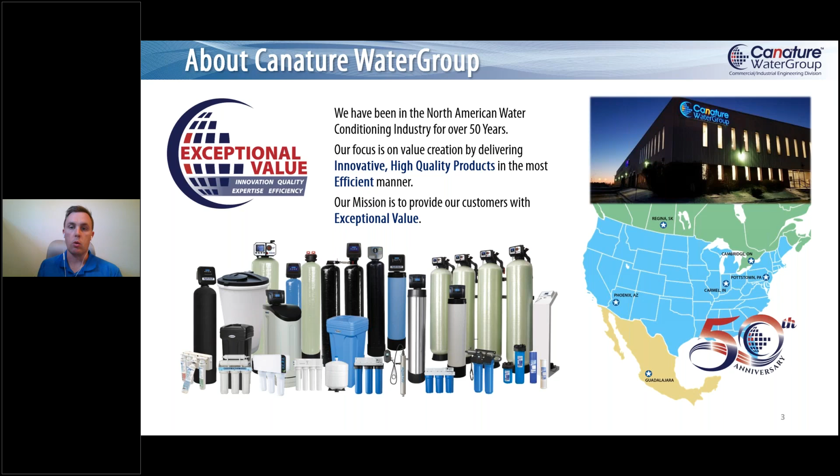Part of that value is having a great team to support not only you when you're making your selections with regards to equipment, but also helping your customers know they've got the support they may need down the road - whether it's standard maintenance, troubleshooting when something isn't working quite right, or even generic questions about how the system works. That way your customers, or even you yourself, can get a better understanding of what's going to be installed, how it's going to work, and how it will work in conjunction with everything else.

So enough about all that - we'll get into the meat of today's presentation. What we're really going to focus on today, as you can tell by the cover, is commercial water softeners: why they're used, where they're used, and the conventional design. Once we've covered that to understand the history and why we're using them, we'll look into how ion exchange works. We'll take a look at water softener meters quickly to understand how they work as well. Then once we've understood both of those options, we'll look at whether there's a better way to actually design a water softener so it better matches the systems and buildings we're talking about.

What I really want to focus on primarily today is commercial applications and municipal water quality, just so we can rein in our focus on exactly what we're looking at - I'll define what both of those mean later on. I won't be touching too much on high purity water; not that we can't discuss it later, but this presentation will focus solely on the other options I mentioned.

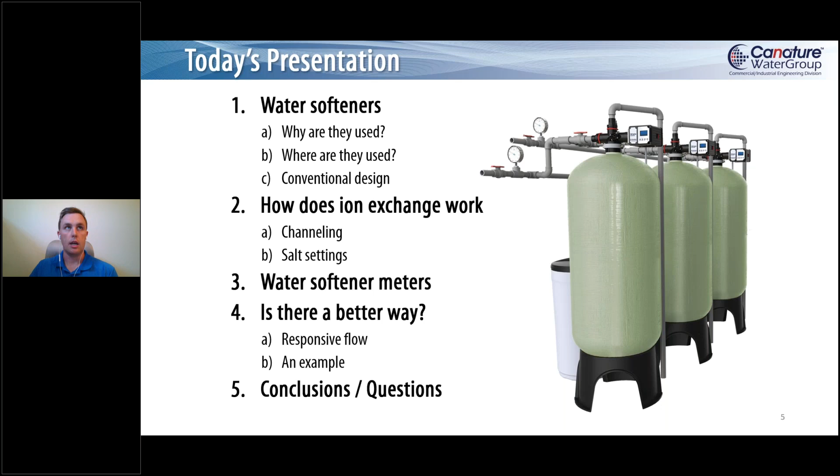So first of all, why are we using water softeners? It's probably the big thing we need to understand first before deciding whether or not to install one. Water softeners use ion exchange to remove nuisance minerals like calcium, magnesium, iron, manganese, and other cations if there are any in the water we're worried about, and replace them with the desired cations to soften the water.

Normally that desired cation or mineral is sodium. However, there are examples of other people using different minerals, potassium being the other one, where they're trying to put that in the water instead of, say, sodium. But sodium is far and away the most common one that we use in terms of the exchange that we want to make.

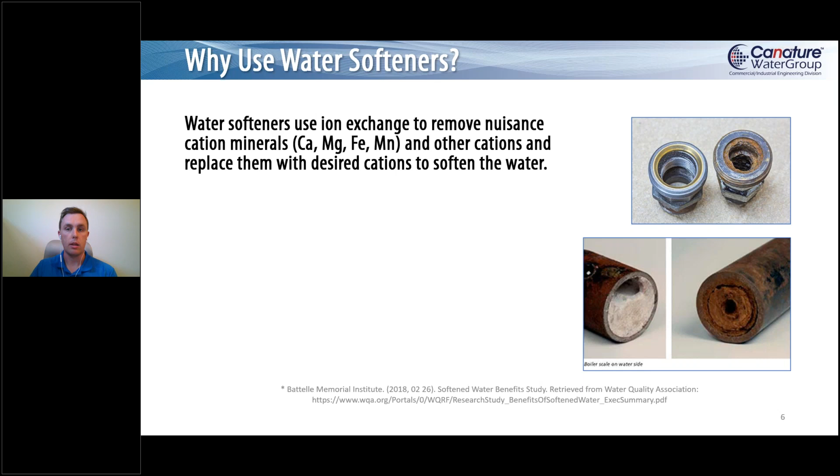So these nuisance minerals can cause things like scaling in pipes, equipment and fixtures, like you can see in the picture on the bottom right. That's some pretty heavy scale on boiler tubes that obviously have not seen the proper pre-treatment and or chemicals applied to them. So part of that scaling and buildup can really shorten the lifespan of your equipment and result in really high maintenance costs, a lot higher than probably you projected going forward.

The nice thing about softened water as well is because all our minerals are removed and you don't have that scaling factor, our energy costs for heating water are far less, because you don't have that scale buildup that provides an insulative layer against the heat transfer that you're trying to get into the water.

Softened water, because of the way that the calcium and magnesium works with the soap in the water, you need a lot less soap in order to achieve the same amount of cleaning power, to put it simply, with softened water compared to hard water.

And then a couple other things here: spotting on dishes, glasswares, automobiles, that sort of thing. So if you're looking at things like hotels, car washes, and that sort of thing, softened water is going to rinse away better, and when it does, you're not going to leave those spots on the cars necessarily like you did before.

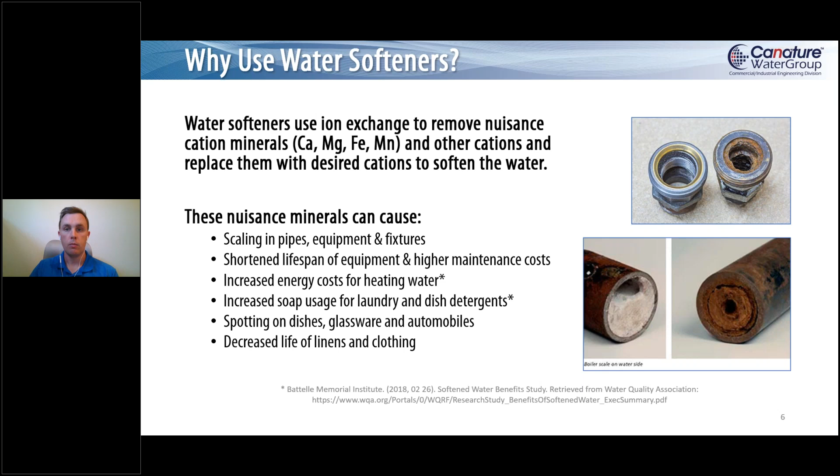So where are water softeners used? Well, I kind of hinted at it a little bit, but to put a bow on it, really anywhere where you're encountering hard water is somewhere where you're going to want to put in a water softener.

Hard water, as defined by the Water Quality Association, is anything above 5 grains. Very hard water is considered 10 grains, but really anything above 5 is something that we should be looking at. So places like hospitals, doctors' offices, and that sort of thing are going to be wanting to look at soft water.

Schools, hotels, restaurants, any place where, like I mentioned before, some of those impacts in terms of the equipment being maintained poorly, some of the aesthetic issues regarding spotting and deterioration of whatever it is you're trying to wash over time — anywhere you're looking at those options is where you want to put in a softener. Another area to look at is pre-treatment for some of these heavy use fixtures, boilers, or RO systems and that sort of thing.

One last point on where they're used: water source really doesn't play into it too much. You can find hard water at any of these sources, whether it's municipal, well, or surface water. Typically speaking, you're going to find less hard water with surface water than you would find with well water, but it's not that one sort of dictates the other.

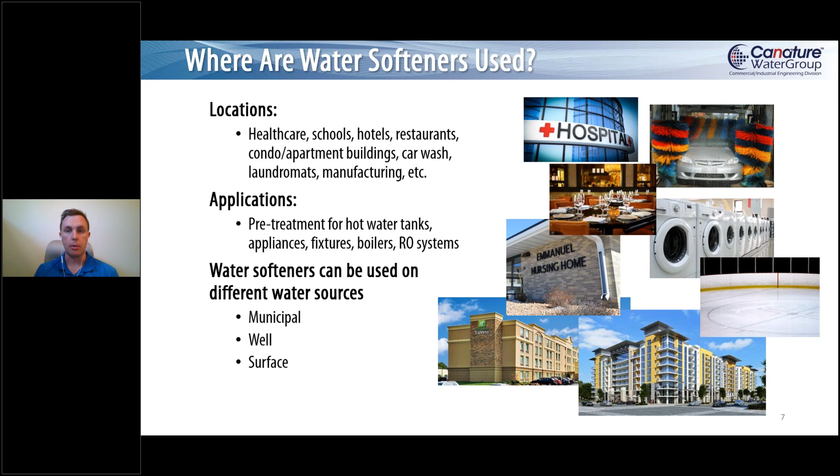The best way to always figure that out is you always need to make sure to get a water quality report of whatever application it is that you're trying to work on.

Now with regards to the softeners, in terms of how we approach softening the water, we'll look at it from two perspectives. The picture on the left here would be a large single or twin alternating system designed around the peak flow rate, and on the right is a multiple tank system (MTS) that uses smaller tanks in order to try and match the flow rates a little bit better.

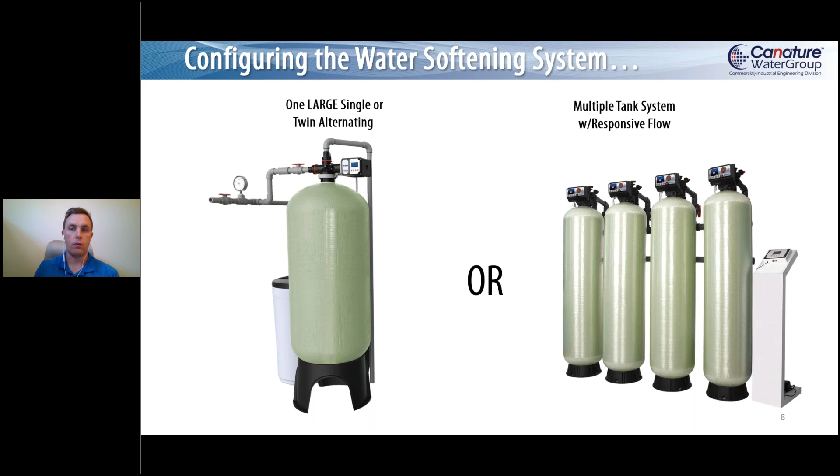So first we'll take a look at the option on the left, this large single or twin alternating, get a feeling for what that means.

With regards to conventional single tank design, it's usually approached as a one-size-fits-all flow rates approach. Usually when designing these systems, you'll define whatever flow rate you want to match, whether it's peak, critical, or maybe based on some sort of pressure drop, based on a service flow rate, whatever you have.

And then you may put two fiberglass tanks on the system if you need 24/7 water. That way when one softener gets depleted, it'll flip the operation over to the second tank, and that first tank that was in service will then regenerate and sit there and wait for the other tank to do its thing.

Typically, these softeners operate at around a 10 or 15 pound per cubic foot salt setting. I'll get into later what that means and how those numbers impact what we're doing.

In terms of your regeneration cycles, they're made standard across all water chemistry types. So we're not really concerned whether it's surface water, which could have some turbidity in it, or municipal water, which is typically very clean compared to some other places, or somewhere in between.

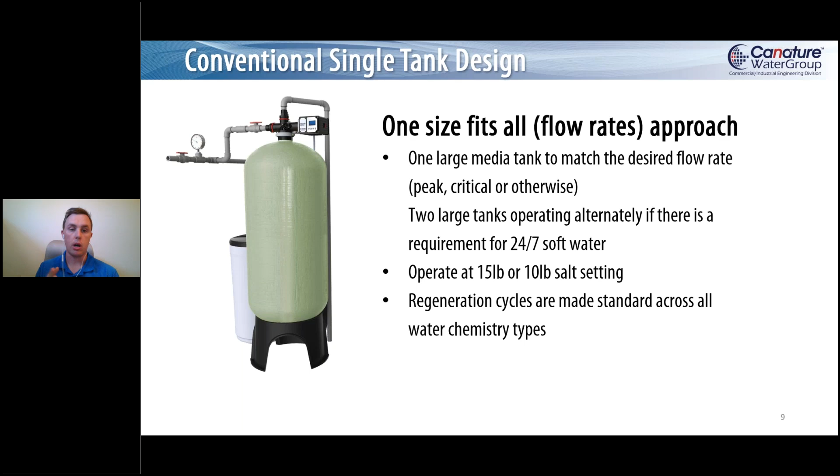In terms of the advantages you're going to see with a conventional single tank design, you're looking at simple installation with minimal piping. There's only 1 or 2 tanks there, so there really isn't a whole lot to do in terms of plumbing.

Simple operation and troubleshooting, meaning you've only got the 1 tank there, so you always know whether or not that tank is either in service or regenerating. If you do need to do some troubleshooting, it's generally pretty easy to figure out which valve is not working properly or media bed or what have you, because there's only 1 or 2 systems there.

For single tank options, these systems are generally inexpensive and they can fit into pretty tight spaces. But once again, that's for a single tank. The duplex option, you have to figure out whether or not it works within your footprint.

With the high salt settings, as I've mentioned, that 10 or 15 pounds, you get a very high capacity per cubic foot, which means you get longer service run times, and you also get some low hardness slippage, which might be advantageous for what you need.

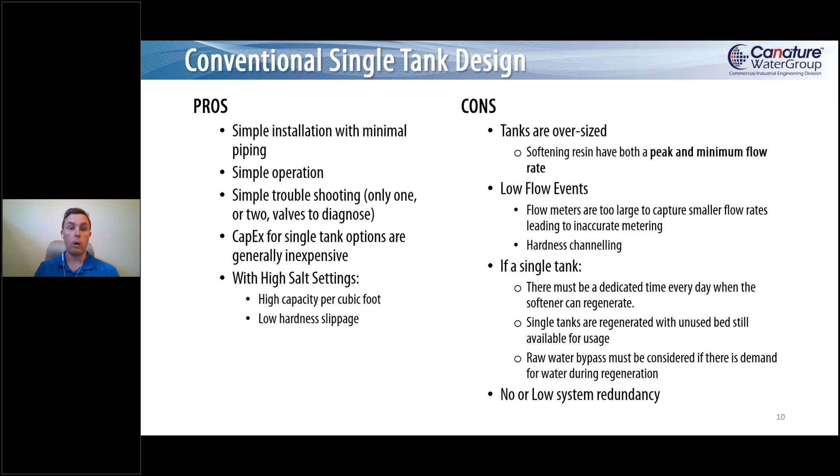However, some of the disadvantages we'd be looking at is that, typically speaking, tanks are way oversized for what they actually need for commercial applications. The thing we're going to really hammer home here today is that softening resin has both a peak flow rate, which we've talked about a little bit, but they also have a minimum flow rate that we need to respect to make sure that the water is getting softened appropriately.

During low flow events, these larger single tank systems generally have a much larger meter on there, and these larger meters aren't able to measure the water to the same accuracy or precision as a smaller flow meter. So that's also something we'll dive into. We'll also talk about something called hardness channeling, which is tied to the minimum flow rate of the softening resin.

If you do have a single tank, you need a dedicated time every day for it to regenerate. In some areas that's not that big a deal, like say a restaurant or resto-bar sort of thing, where they've got the lunch hour, the supper hour, and then they go into the evening for drinks.

But generally speaking, during the midnight hour or after midnight, depending where you are, there's really no water usage to speak of, so they can regenerate then. So a single tank system might work there. A lot of places that need 24/7 water, however, that's not necessarily the case.

If you do use single tanks, they'll also be less efficient because you're always going to design with them in mind, saying, hey, I want to make sure I always have softened water, so I'm always going to design a little extra capacity in there based on my run times and my usage.

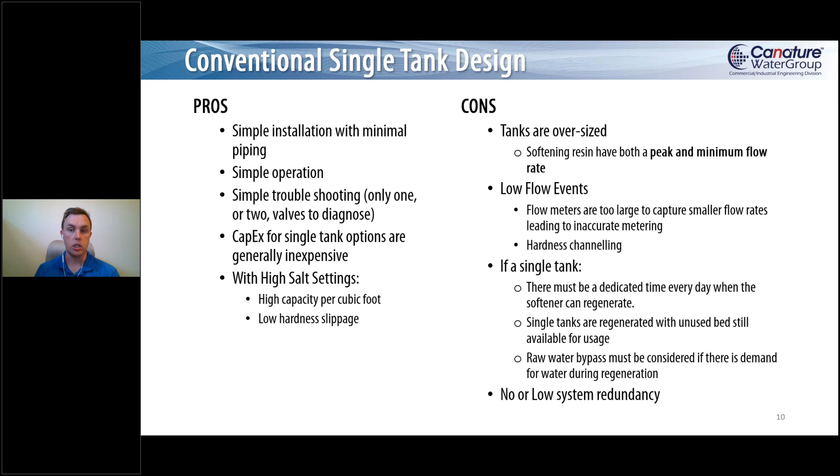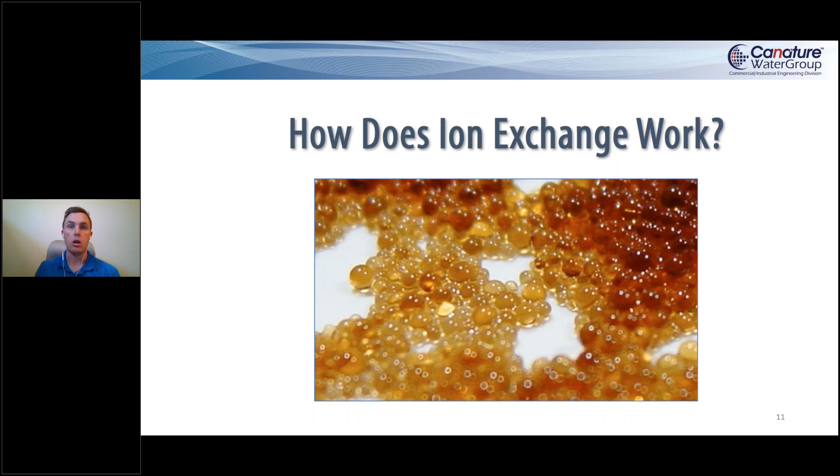So now that we've understood that, we're going to get into some of the basics of softening and really how it works. First, we're going to look at the workhorse of the system, the part that does all our work when it comes to softening water: the ion exchange resin. So ion exchange beads provide places - if you read the actual spec sheets, they call them functional groups - where these nuisance minerals I've spoken about are exchanged with sodium.

In the picture on the right here, we're showing a demineralization application where we actually have sodium being removed for protons, for hydrogen protons. If you picture that those sodium ions are actually calcium or magnesium, then it's the same sort of idea.

However, one inaccuracy with this picture that I like to point out is the way that this picture is shown here, with the cation exchange resins, these guys in red, viewed more like marbles - impervious marbles that water goes around in between the beads, and then goes straight down to the distribution, where you only have the exchange surface on the outside. And this is the way I actually thought of it for a long time too, before I started to educate myself on all this.

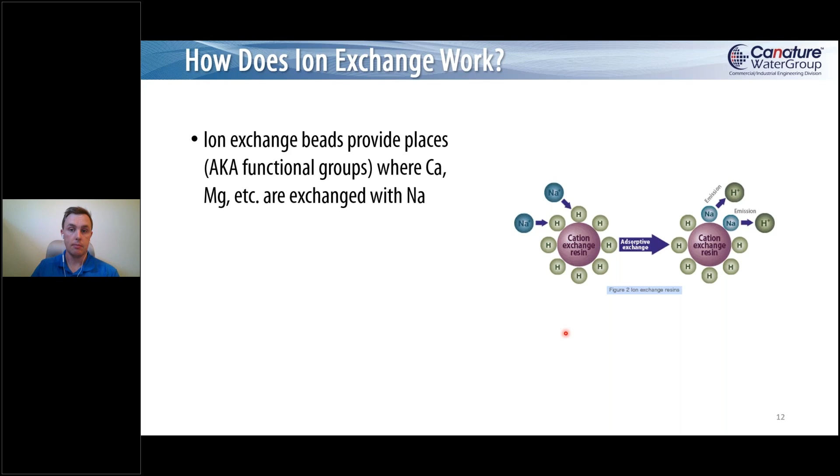What it actually looks like, these resin beads - they're not impervious marbles. They're more like spaghetti that's been stuck in a colander for too long after you've drained it. You know when you cook spaghetti and drain it off and leave it sit in the colander for say 10-15 minutes, and you try and pick it up, you get the whole clump at the same time. Well, that's more what ion exchange beads look like when you really get down and close on them. And all of those strands of spaghetti have all those functional groups where we want to do those ion exchanges. Really what we want to try and do is force the water through the beads - that's where the majority, if not 99+% of our exchange sites are, on the inside of that bead, not on the outside.

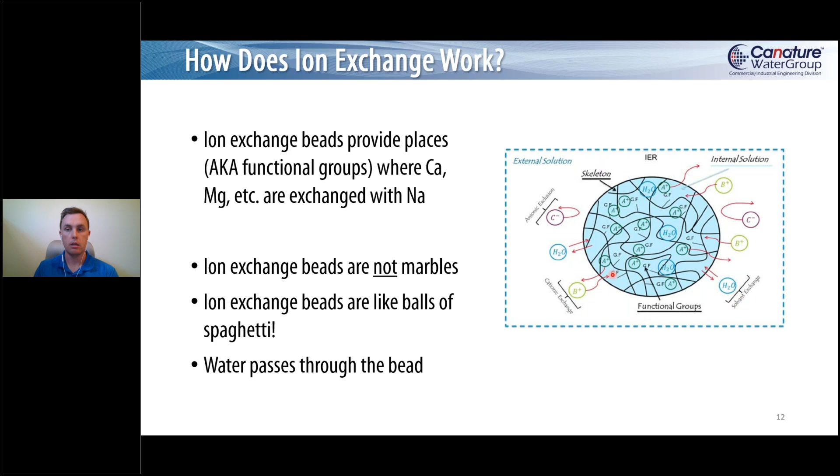And so this is where we speak to hardness channeling a little bit. When a softening system is sized appropriately, our hard water passes through that little green line there that I've shown, and it goes through the resin. This is only one path that it can take, but you can picture that the water will enter and exit at multiple random locations across the resin bead, meaning our entire resin bead is used evenly. And that means that as our resin beads are used evenly, as we continue to go down the depth of the bed, it also gets used evenly. So you're not worried about hardness bleeding through.

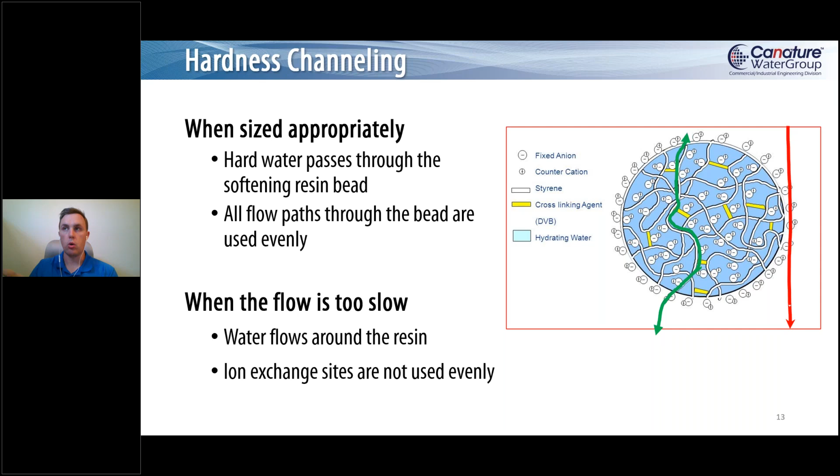However, when we don't force the water through the center of the resin, what ends up happening is the water starts to go around it. You can imagine this - only the exchange sites on the outside are actually used, but then you've got thousands upon thousands of exchange sites in the middle of the resin that aren't being used. So your capacity isn't being used properly, which means you get hardness slipping through the resin bed faster than you had anticipated. So why does it do this? Why doesn't it just go through the resin bead normally? Well, in a word: lazy. Water is lazy. Water is like all of us.

It has a point A that it wants to get to and a point B. Basically we're forcing it through the softener on the inlet side, and the water just wants to get to the outlet side. It doesn't care how it does it, it just wants to do it the quickest and easiest way possible. Well, the quickest and easiest way possible is actually to go around the resin.

And this is because of, if you've taken any sort of fluid mechanics classes, the no slip condition, but I'll explain this a little bit better here.

If you haven't taken it, you can picture when you've opened up a tap in your bathroom, kitchen, or wherever, just a little bit. You see the water comes out in a nice clean stream. You don't hear all that twirling, swirling noise. It just comes out, drops down into the sink, pools, and then goes away. That's what laminar flow looks like.

And the reason why it's called laminar flow is that the profile looks like this within a pipe, in the sense that the pipe wall holds back some of that water because it's got some friction associated with it. Meanwhile, the middle of the pipe, far away from the pipe wall and far away from any water molecules that are going to be held up, is going to go the fastest.

That works really well, but you can also make this water deviate and do a lot of different things because you're not pushing it through fast enough. So what we actually want to see is more something like turbulent flow.

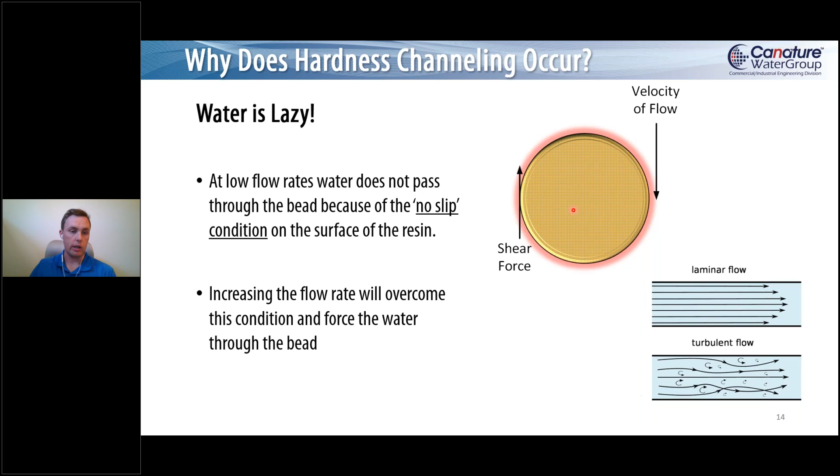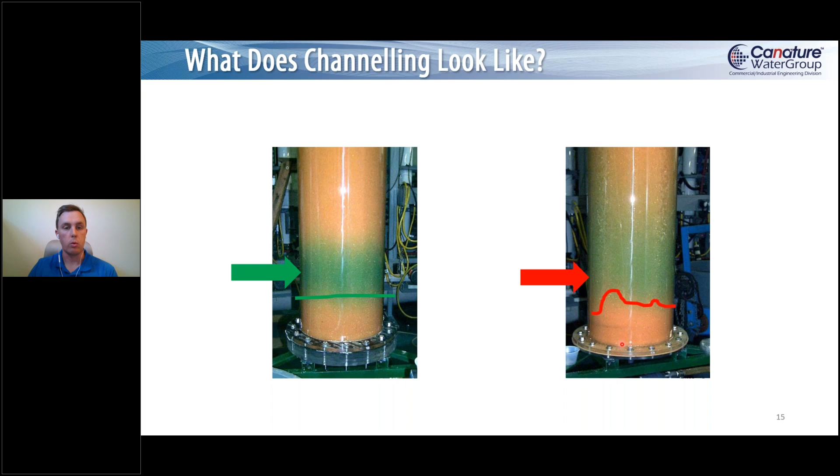So basically it means we have no idea where the control valve thinks the leading edge is, which is a problem, because if the control valve thinks the leading edge is way up here, that's a problem because we have all this spent resin down here and we're very quickly going to bleed hardness. So that's what's important with regards to those minimum flow rates versus higher flow rates.

So let's talk about salt settings. Just briefly here, it's one table, pretty quick, easy to understand. When I talked about those 10 or 15 pound salt settings, that means when we do regeneration, how many pounds of salt per cubic foot of resin do we want to apply in order to regenerate and kick off all those nuisance minerals and send them to drain.

So most large softeners are operating around that 10 or 15 pound mark. That means their capacities are higher, their base leakage is lower, which is good, but our water usage and our salt usage is way up per regeneration.

Versus if we get down to a 6 pound salt setting, yes, our capacity is reduced, but if you look at it, 15 pounds down to 6 pounds is, I think, a 60% reduction. But we've only reduced our capacity by 30%, 33%, right? That's not that big a deal in comparison. And that's because of the law of diminishing returns when it comes to actually regenerating the resin.

In terms of base leakage, 1.1 is fantastic, obviously. It's basically no hardness left in the water versus 5.5. But you'll notice this 5.5 number, if you were to look up some manuals for what most equipment considers soft water to be, it's all less than 1 grain per gallon, which is about 17 parts per million or milligrams per liter. So this 5.5 is still well under that.

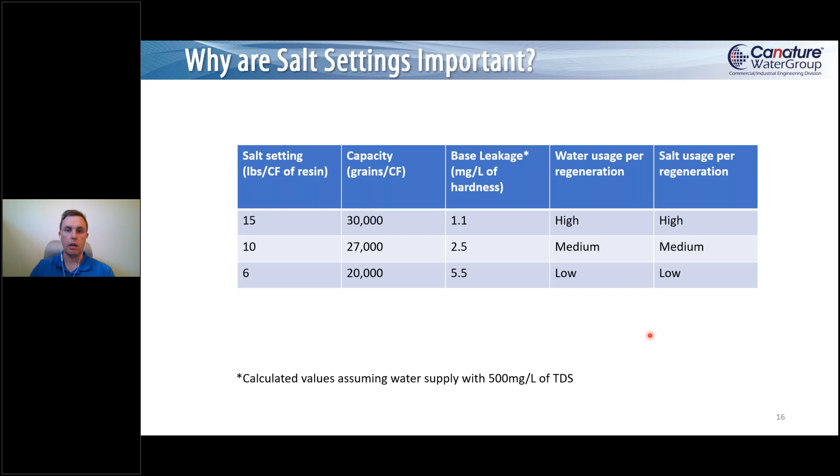So now when it comes to these flow meters, larger tanks need larger control valves because typically they have much higher flow rates going through them. So if it's a larger control valve, larger flow rates mean we need a larger meter. The thing about flow meters is they don't actually measure flow rate. They measure the velocity in the pipe, which then gets interpreted into a flow, whether it's calculated or whatever.

Versus when we get up to a 3-inch meter, then we've got that 7 gallon per minute mark, which is 10 times higher, but we've only increased our pipe diameter 3 times. That has to do with the whole area thing.

But the big thing is that while these are the minimum flow rates to maintain the flow rate, because this is what you're going to find on spec sheets typically speaking, once a flow meter stops, in order to get it moving again you need about double these values.

So that means now this 1.5 or 1.4, still not bad, but this 3-inch meter needs 14 gallons per minute. That's like the equivalent of 10 toilets running, or maybe 15 faucets. That's a lot of faucets that need to be online at once in order for this system to recognize flow and calculate for it. Once again, that gets to be a bit of a problem.

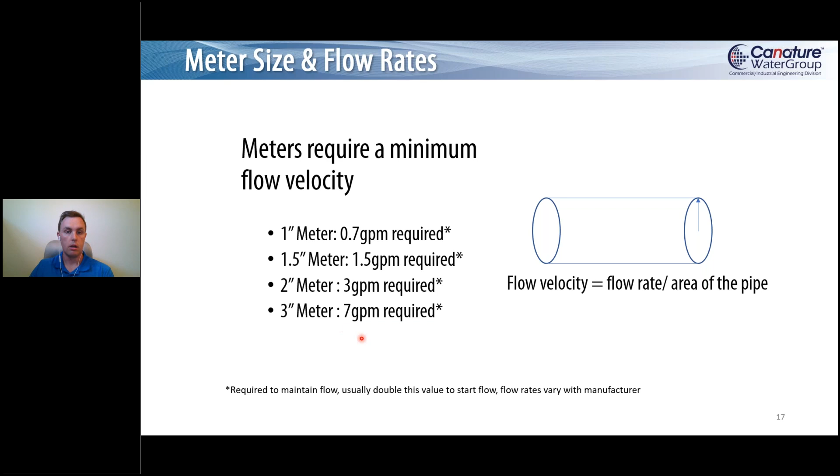So the big question about all this is: is there a better way? Now that we know all these things, we know some of the pitfalls of those larger softeners, where do we go from here?

So why do we need a change? Well, these old design values we're talking about, these peak flow rates, are still based on textbook values that are pretty old. If you take the Hunter curve, for example, that a lot of people are probably familiar with, in order to calculate your peak flow rates, that's still based on numbers from the 30s and 40s at best. There are some newer versions out there, but generally speaking they still oversize things quite drastically compared to what's actually being used.

Everybody's kind of aware of that for the most part, but when you're using it to size pipes, if your pipe's a little bit bigger, it means the person on the 30th floor of your condo building isn't going to complain about low water pressure because their pipe is choked down too much—not a big deal. The problem is when you have other equipment in there that has a minimum flow rate, that's where it becomes a problem, if you don't account for that minimum flow rate.

So to that point, one size fits all never fits all flow rates. And that's the major problem with these single and twin alternating systems—they're just based on that high peak flow rate. Those peak flow rates, by definition, are done for maybe a minute a day, 30 seconds, 10 seconds, whatever it is. There's still over 1,400 minutes left in the day that need to be accounted for in terms of your design. So that's something that needs to be considered.

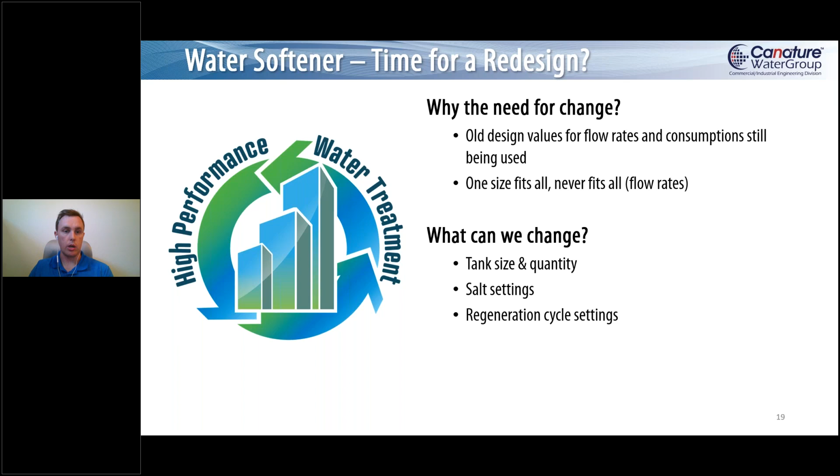So what can we change? What do we have the ability to change when we're designing softeners? We can look at our tank size and quantity. We can look at our salt settings, and we can look at our regeneration cycle settings. These last two will help with water efficiency, like we've stated. But the big thing is, how are these going to impact performance?

Well, let's get back to basics here in terms of what you need to know when designing a softener. First, let's look at the big bold items. We need to know the water chemistry, we need to know daily flow rate, we want to know what our flow rates are at any given time, and we want to know what the application is. Some things that aren't necessarily always looked at are things like the water source.

Are we talking about municipal water? Are we talking about well water? If it's well water, is it a dugout? Is it a 300-foot depth well? What are we saying here? Or is it a spring? Or maybe we're sucking out of a pond that has canoers on it frequently, and that intake pipe is going to get filled up with turbidity. And that's actually a thing—I've run into that before, where somebody was having trouble with their softener, and it turned out every 6 months or so it would be all filled with sand.

Because there'd be some paddlers that would be going through a pond where it was close to the intake pipe.

Next thing we want to look at are our flow rates, and we need to understand what is the minimum flow rate that we're willing to accept. Not that we need, because obviously it would be nice if it was zero, but it's never going to be zero. That's borderline impossible. So we just want to understand what is our minimum flow rate that we're willing to accept for the softeners, and then how do we manage that?

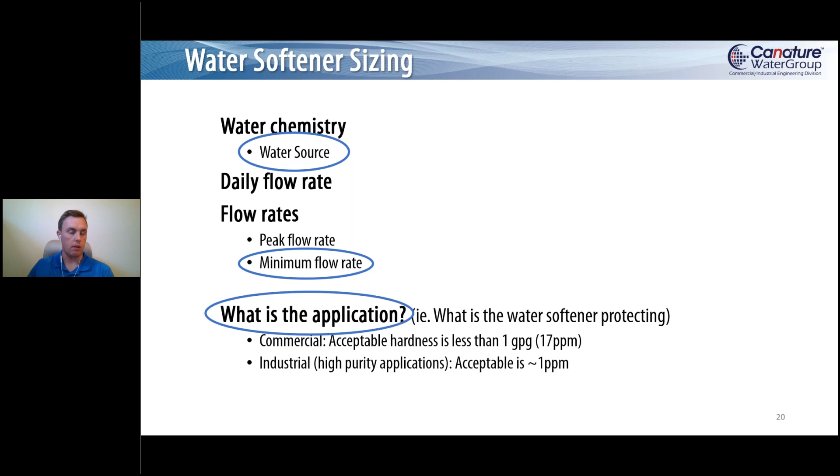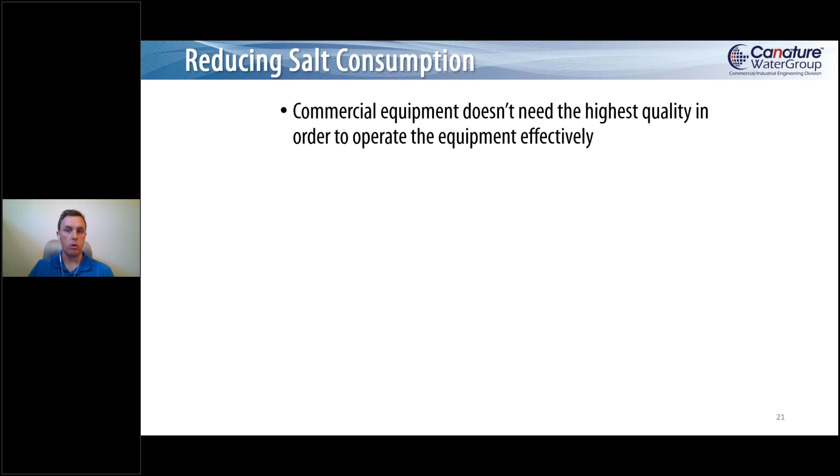It all sort of depends. So when it comes to reducing salt consumption, because commercial equipment doesn't need the highest quality water in order to operate effectively, we can reduce our salt setting and still get performance we're okay with. If you remember that table I showed, we're talking about going from 1.1 parts per million of hardness to, sorry, to 5.5 - that's still well less than 17. So 6 pounds is probably fine. If you're going into another application, you need to review that again.

Because we're going to be using less salt, that's less salt going down the drain into wastewater systems, into irrigation fields if the wastewater is used for irrigation, wherever it may be.

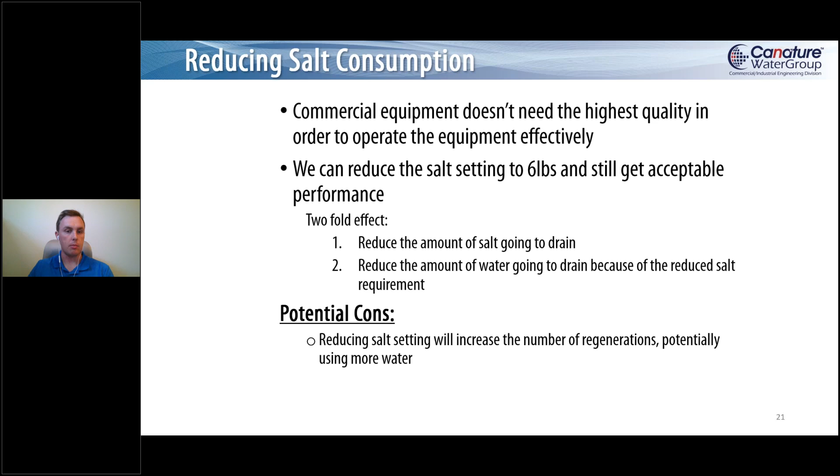Downside of it is, because we reduced our salt capacity or salt setting, we've reduced the capacity of our resin by 33% compared to the full 15 pounds. So that might end up increasing, well, will increase the number of regenerations, so we might end up using more water. I'll speak to that in a minute.

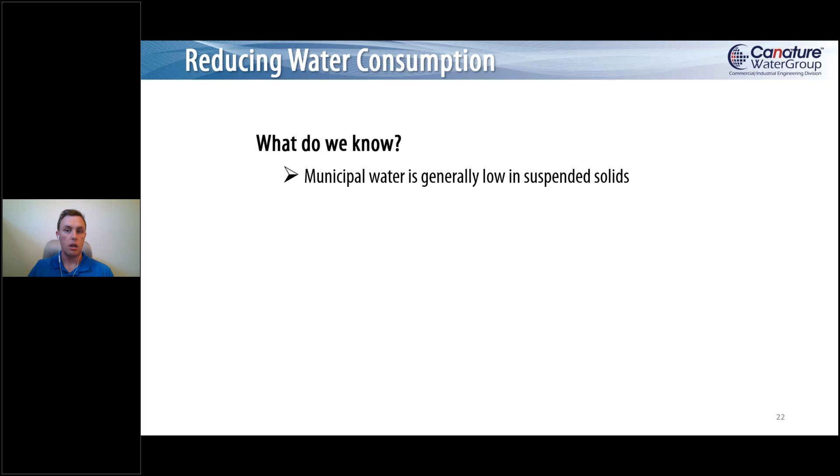So what do we know about reducing water consumption? Once again, in terms of our backwash times and that sort of thing, where municipal water is generally low in suspended solids, backwash times can be reduced instead of that standard 12, 15 minutes, whatever it is you're currently using. We can reduce it down to maybe 8, 7, 6 minutes, or maybe periodically we can get rid of it altogether.

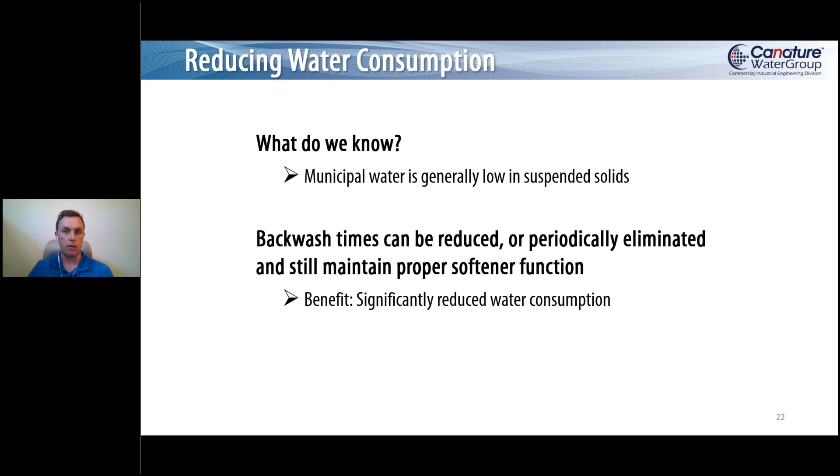Maybe, sort of depends. But the big benefit is that we're going to be significantly reducing the water consumption overall. So, responsive flow softeners - you might also know them by the name progressive flow, demand recall, demand flow. They all mean the same thing. I'm going to say responsive flow for this presentation.

So what are they? Typically we're talking about 3, 4, 5, 6 tanks all plumbed in parallel that will have softeners come online and offline based on the actual flow rate going through the softeners at any given moment. So why does it work better?

Well, we're able to capture all those peak flow rates, and then we're also able to capture those low flow rates as well, because we'll bring the tanks online and offline as needed. Because we have smaller tanks, we're able to have smaller control valves and smaller meters, meaning we're able to meter more accurately and precisely. And because our tanks are smaller and the number of cubic feet online at any given time is also smaller, our minimum flow rate for our system is smaller.

And then a lot of people are thinking, that install looks pretty complicated, must be worth quite a few bucks compared to the standard systems. Well, that's also one of those things that's not always the case, and we'll get into that.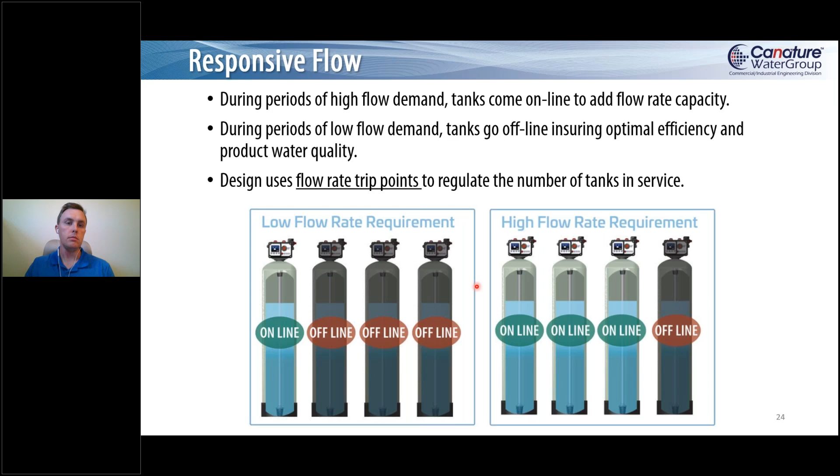So in terms of the CapEx, because at the end of the day, if this was way too expensive, people wouldn't use it, right? So with multiple tanks, you must have a lot of valves, a lot of meters, a lot of everything, right? So it must be more expensive.

Well, not necessarily the case. So in terms of your tank size, to look at one metric here, when you actually look at your tank size versus the amount of resin that you can put in any given tank, this actually ends up being pretty much a flat curve. You can look at the formula up here in terms of our linear regression. It's pretty much flat. You might as well call it flat.

The reason for that is that basically a lot of people use these smaller tanks more often, so the equipment designed to make them is a lot more readily available. It's easier to ship these tanks because you can put a lot of them on the skid. So there's a lot of good things happening at these tank sizes because they're made so much more often. When you get into the bigger sizes, shipping containers aren't necessarily designed to pack that many of these size tanks. The equipment needed to make them is more specialized, therefore more costly. It's a lot of these economies of scale things that build on each other that show that when you look at the cost per cubic foot for a tank, it's pretty well flat, regardless of whether you've got 14 inches or 63 inches.

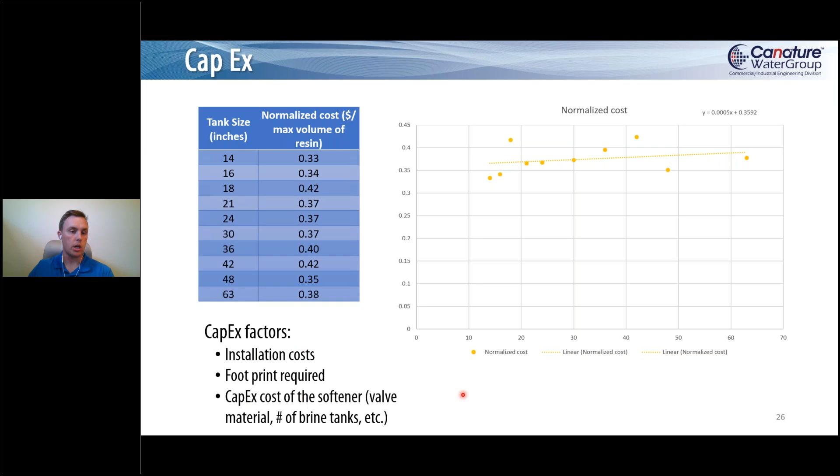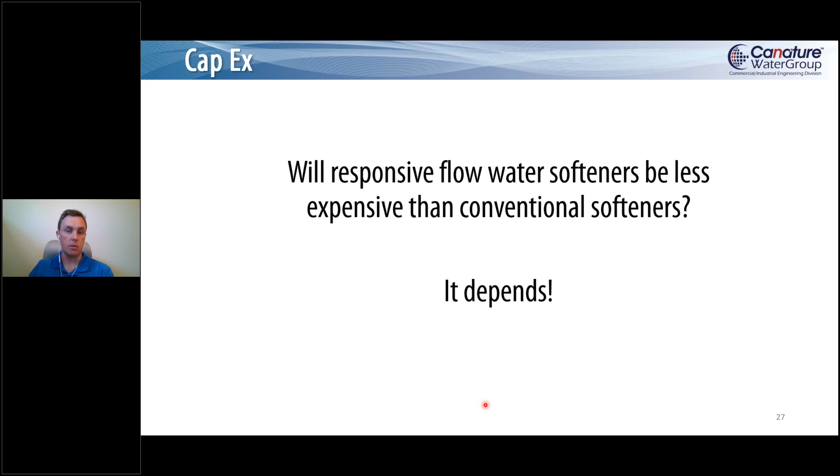So will it be less expensive than conventional? Well, it depends. At the very least, more often than not, you're going to be around the same price, if not even just slightly cheaper based on what we've seen out there, because those smaller valves are typically less expensive than the larger valves, even when you multiply them out.

So operational advantages of our responsive flow system are that you're able to capture all the high flow rates and the low flow rates. You meter more accurately, but does any of this actually matter in the real world?

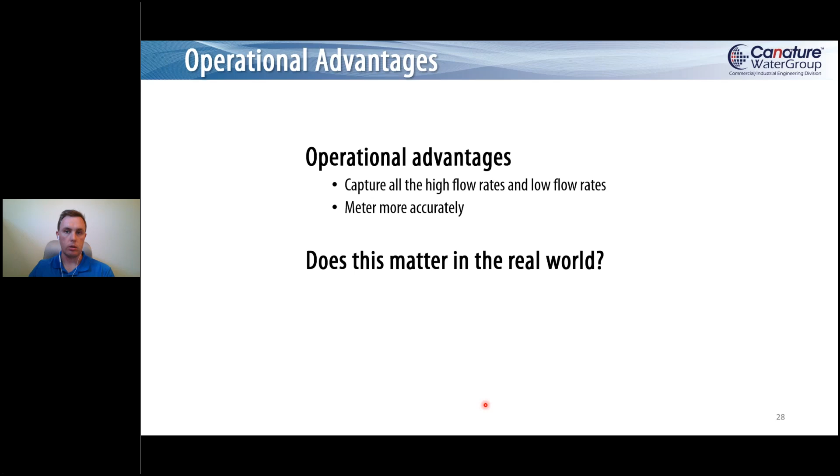Well, we're going to get into a case study here. This case study is from a hotel in Regina. You've got 40 hotel rooms, 40 sinks, each one with a toilet, sink, and shower. You've got public washrooms with what they need, and then they also have the laundry machine since they're going to be doing their own on-site laundry.

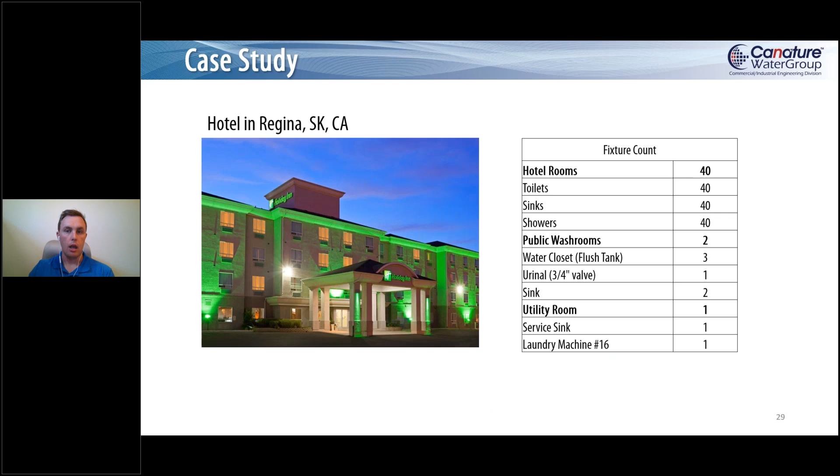So in a perfect world, the hotel's demand for soft water would be 100% flat. That would make designing softeners very boring and very easy. I mean, boring is easy a lot of times in our industry. So, but what does it actually look like?

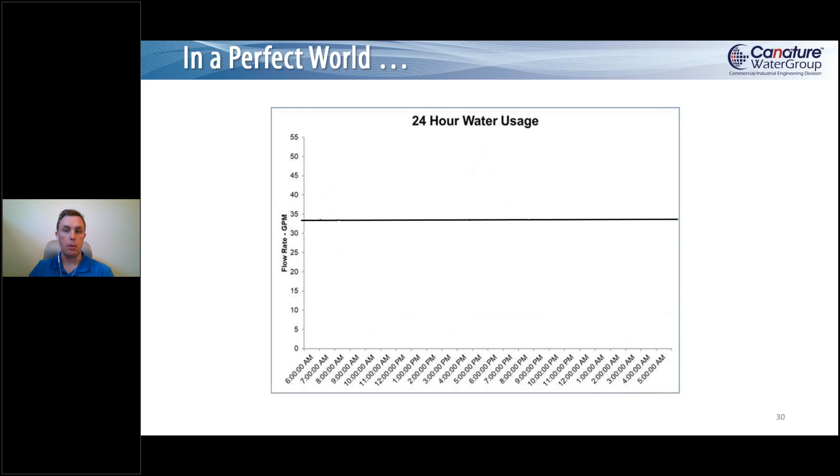This is actually a one-day scale data log that we took from the actual hotel, showing its flow rate. So you can see it goes up, it goes down, it goes everywhere in between throughout the day. So really, it's not just a flat value.

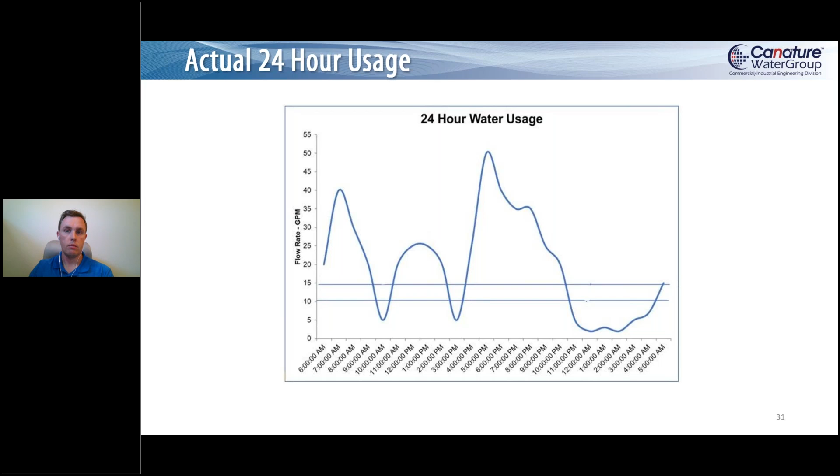So in terms of our sizing, we've got a daily flow rate of 3,200 gallons. That's based on book values, as this was a brand new hotel that didn't have a water meter. A water meter would have been nice to understand what their daily flow is, but in this case we'll use book values. Regina municipal water is roughly 20 grains, sometimes higher, sometimes lower, depends on time of year. Our peak flow calculation actually turns out to be 84 gallons, and I'll show you in a minute why that's important and relates back to a comment I made earlier.

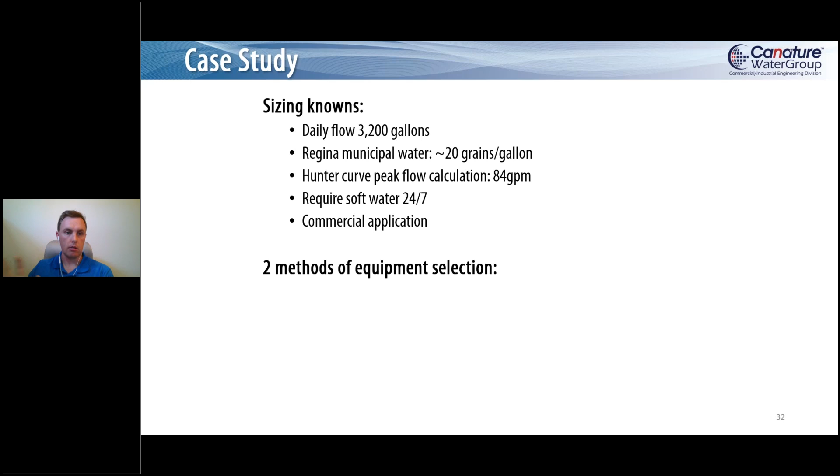Because it's a hotel, they require 24/7 soft water. We're also dealing with a commercial application, not super high quality - the equipment here doesn't need the highest quality of water.

So let's compare two systems. Our conventional twin alternating 10 cubic foot tank with a 2-inch valve, versus a responsive flow quadplex 3 cubic foot tank with a 1.25 inch valve. The minimum flow rates regarding channeling are a lot higher in the conventional system than on the responsive flow, and we'll show why that's important in a minute.

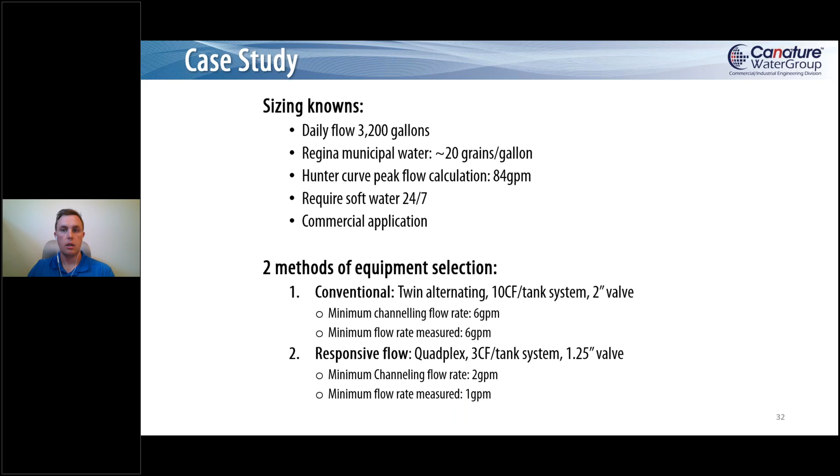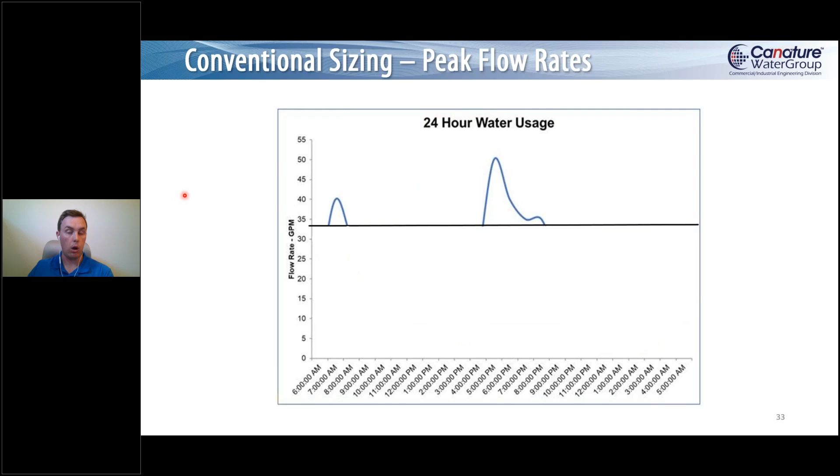In terms of designing for peak flow rates, which is what the conventional system uses, you'll notice our peak flow rates get a bit of a peak here in the morning around 40 and then another peak of around 50. That's a lot lower than the 84 we had calculated before, so that in itself is a problem. But these peak times only happen for maybe about 2 hours of the day, and don't even come anywhere close to the peak we actually calculated. So number one, we're starting to over design our softener already.

When we look at the whole profile, you'll notice that the conventional system is going to have trouble, or not measure flow rates down here at all, during prime business hours, 10 a.m. to 3 p.m., and also throughout all of the overnight hours. That's quite a problem, because our calculated peak flow rate doesn't even show up on this chart, versus we've actually got channeling issues for about a quarter of the day. Not only channeling issues, but metering issues and everything associated with that. So that's a big problem with that conventional system.

If we look at our responsive flow system, now we've got minimum flow rates that are below anything that was measured at the hotel during that time. So that responsive flow unit is going to be able to capture all those flow rates, soften effectively, and not have the same problems that the conventional system did.

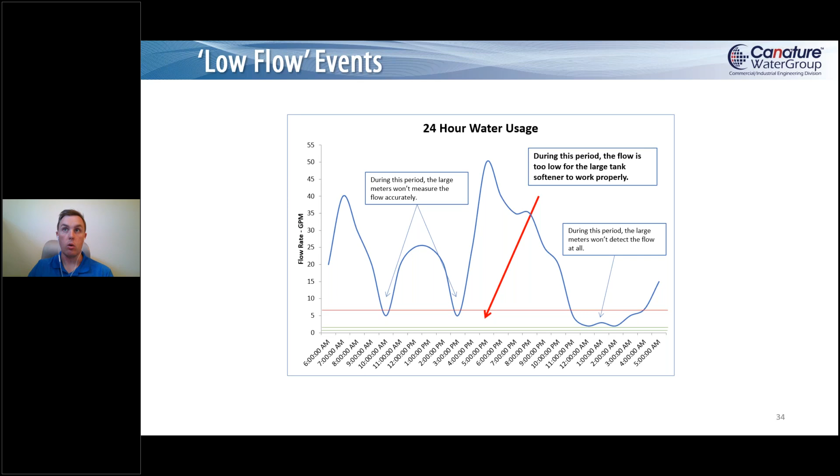This next slide here, we've got an animation going once it loads. You'll notice our tanks on the left-hand side, the responsive flow system, goes down evenly. As the flow rates increase, we're going to bring our tanks online, eventually once it hits 15. There it goes, so now we've brought our second tank online. It'll eventually bring the third tank online as we go here. With our traditional system, notice how we've only ever had the one system online the entire time, regardless of what the flow rate is, so we're just using that capacity up as we go.

You notice here when we are at our low flow rates, we start to get channeling issues. Just picture that happening multiple times a day based on that previous chart I just showed you. So it gives you an idea that eventually all the channeling is going to result in hard water slipping, getting to those laundry machines where they're going to see hard water, meaning they'll have to use more soap or hotter water to clean their clothes effectively. They're going to be spotting on dishes, glassware, whatever. So it's one of those things that's often overlooked, but it's really important to how you want your system to work when you design for it.

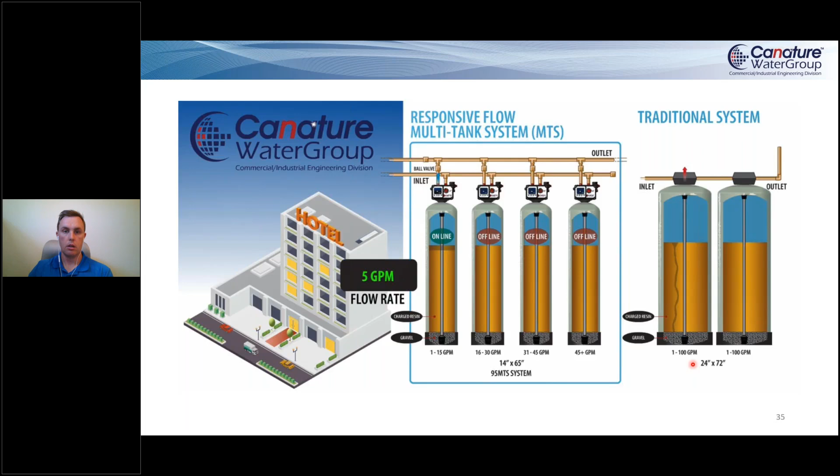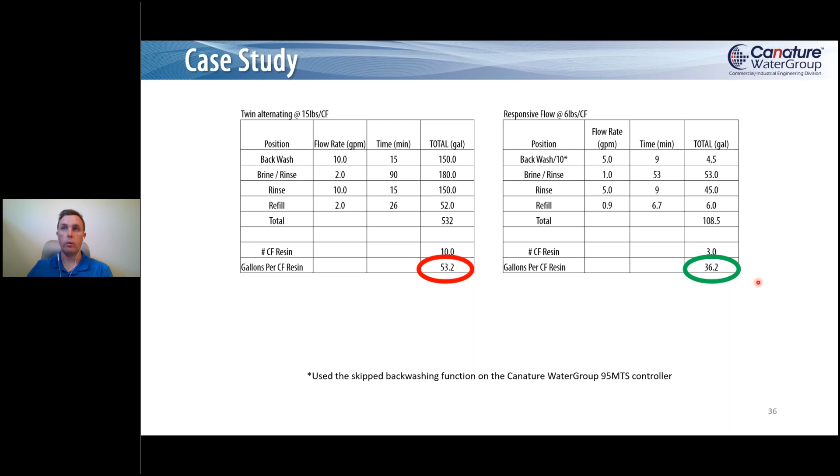In terms of water usage on either system, you notice right away a big win for the responsive flow system when we look at gallons used per cubic foot in terms of regeneration water, 53 versus 36. However, as I've discussed before, our capacities are a lot lower, so how does that play out? Well, when we look at it normalized per 1,000 grains of hardness treated, there's actually a slight advantage to the twin alternating system compared to the responsive flow. However, we're talking about 0.04 of a gallon on almost 2 gallons, so we're talking about a 2% difference in terms of water use on these two systems.

There's another version where instead of a quadplex, we use a triplex, and that water usage advantage actually flips on its head—there's actually an advantage to the triplex system where it ends up saving about 20% more water than the twin alternating system does. So it's one of those things you always sort of want to try and balance what you're looking at.

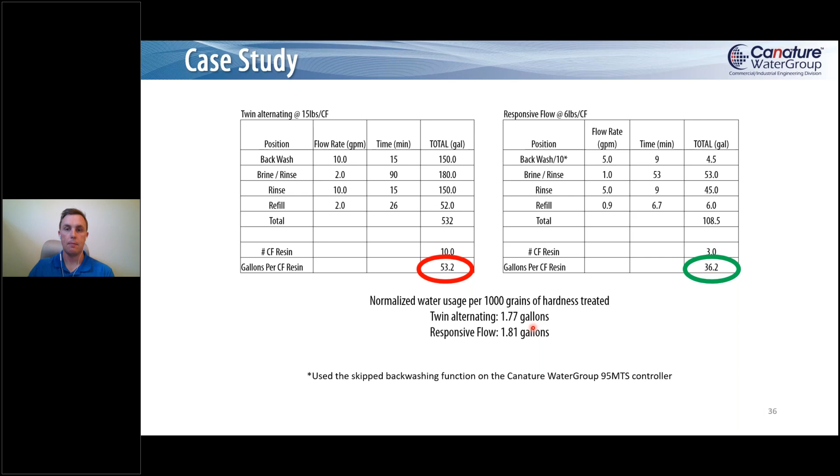So in terms of some other numbers with regards to this system, our salt use per year is way down, as we talked about. Our water usage is slightly up, but that's fine. Our total annual savings ends up being just shy of $1,000, which is pretty good. But what does that mean relative to the amount of OPEX costs you would normally have? Well, that actually ends up being a saving of around 30% for this system.

So while $1,000, or close to it, for this one water softener ends up bringing back your ROI in a hurry, one softener versus the other, if you can imagine this 30.5% on a much larger system or multiple systems—and I know some of you are probably working on projects where they have the need for a much larger softener, or many softeners throughout a hotel complex or that sort of thing—now that $1,000 can become 2,000, 5,000, 10,000, depending on how much water and salt they're using. So this number can really add up in a hurry just by adopting a different kind of softener and a different way of thinking towards softeners.

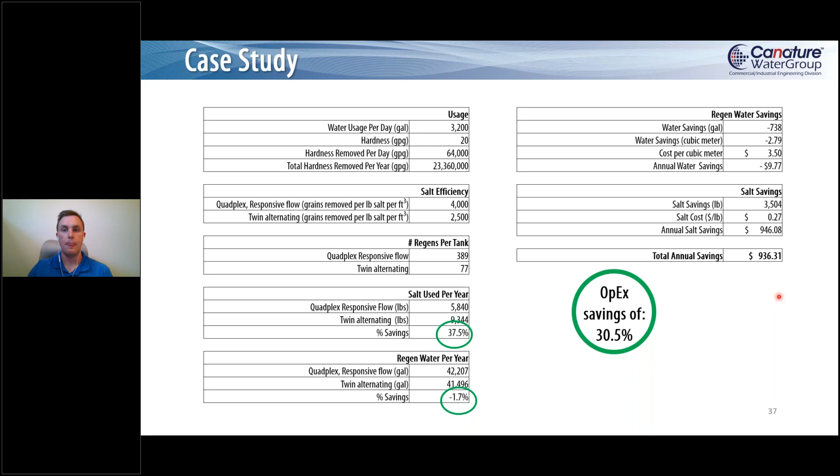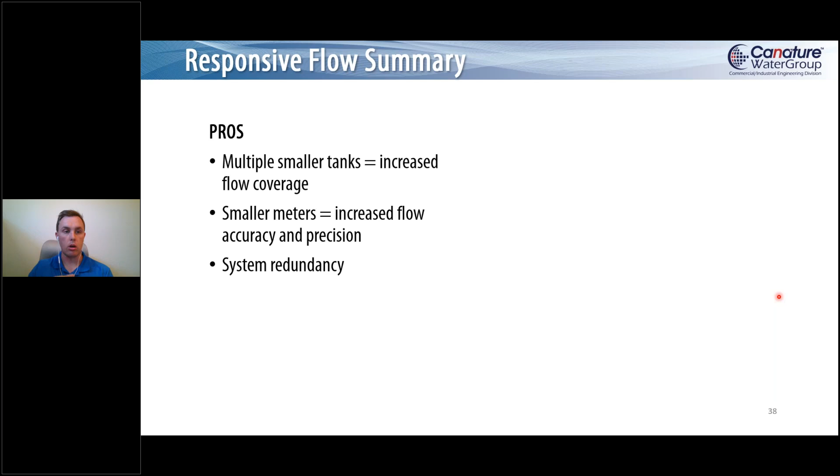So turning to the summary regarding responsive flow softeners. Our advantages: we've got multiple tanks, which means better flow coverage. We're able to soften down to small flow rates all the way up to big flow rates. Same thing with those meters—we've got better accuracy and precision. Our system redundancy, which I haven't really talked about, also goes up, because now if one softener goes down, it's not as big a deal since we still have 2, 3, 4, 5 tanks sitting there ready to go online. That gives you time to make the changes or repairs you need to. A lot of the time, as I mentioned, you also get a CapEx reduction on the softening equipment itself.

Now in terms of some of the disadvantages, a lot of these are things that us as a manufacturer need to take on. One is lapping of online tanks—meaning in terms of your system needing tank softeners to regenerate, sometimes you might have two softeners basically racing to see who finishes first. Well, at least with our programming, with Canature WaterGroup's valves, you'll have minimum values so that if two softening tanks are within a certain percentage of each other and far enough down their capacity, they'll actually kick one softener on early to regenerate versus the other. That way, you'll never have that lapping scenario where one softener is sitting there waiting to regenerate, potentially passing hard water if it needs to bring on multiple tanks.

You can have footprint challenges when compared to single tanks—with single tanks, obviously there isn't much there. But you do have some flexibility; I've seen many installations where they've got brine tanks across the room, and they've just run the brine lines a little further. They've created a little hallway with softeners on one side, brine tanks on the other. There are a bunch of different ways to get around it, and a lot of these are more flexible when you're talking about new construction. With renovations, you have to be a bit more flexible with what you need to do—I've even heard of scenarios where they've put brine tanks in the parking garage. So you kind of have to do what you need to do.

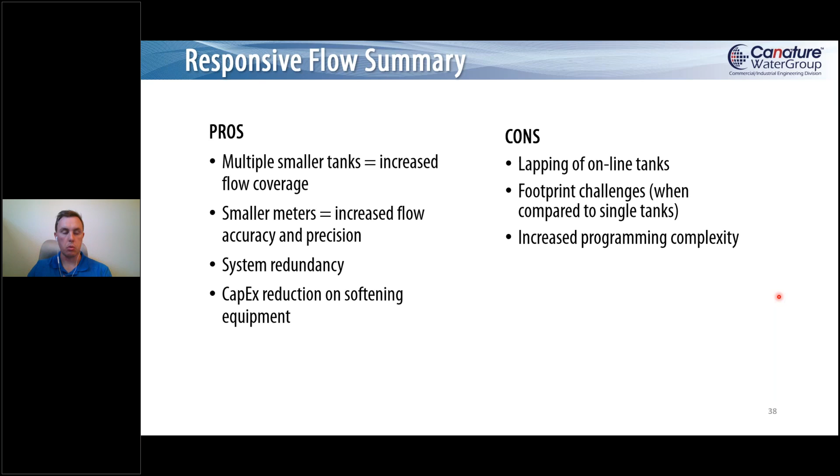Increased programming complexity is another factor—once again, something the manufacturer needs to take on, that being us, to make sure everything works properly. Those are things we test for ahead of time to make sure the system works the way it's intended to. In terms of installation costs, those also might increase, but once again, you've got smaller pipes now because you have smaller valves and that sort of thing, so there might be a balance there.

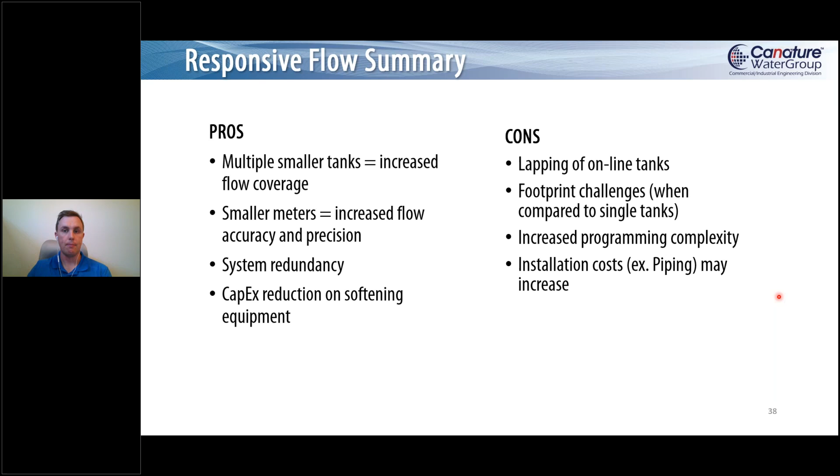In conclusion, the downside of conventional softeners: they're typically based on peak flow rates, which isn't a good thing to do. They have regeneration cycles that assume worst-case scenario water and multiple-day capacity, all those things that drive up the size of the softener and the amount of salt it uses, and potentially water as well.

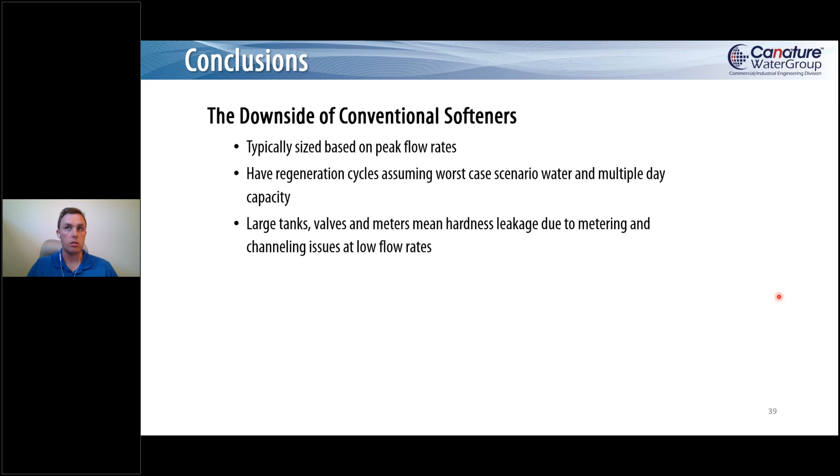With a responsive flow scenario, you can capture both the high flow rates and the low flow rates, which means your butter zone, for lack of a better term, is a lot larger. You can do single-digit gallon-per-minute flow rates and 100-gallon-per-minute flow rates all on the same system. You can't say that for a conventional system with those large single or twin setups.

Your smaller valves have smaller meters, so you're able to meter more accurately, so you know you're regenerating when you need to. You won't have to monitor it and kick it into an early regeneration because you're bleeding hard water before you thought it was going to.

You can reduce your salt settings based on your application needs. That's the big thing a lot of people can do right now, even without a responsive flow system, but choose not to just because it's easy—just set it and forget it, walk away. Well, there are a lot of cost savings to be had there.

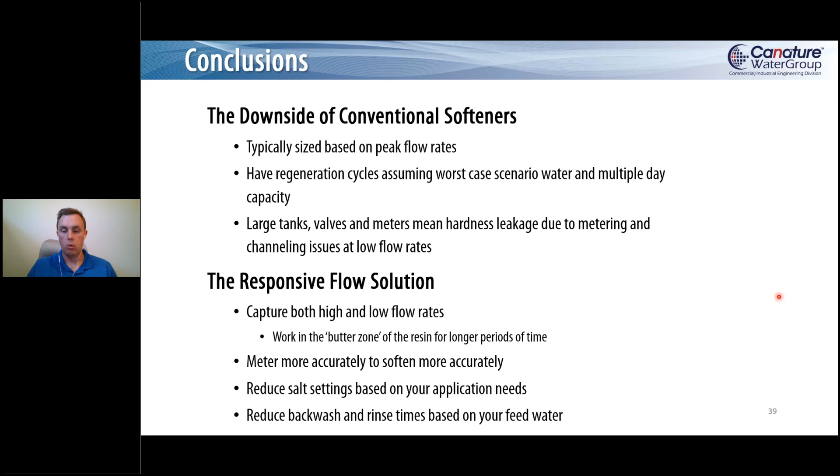You can also reduce your backwash and rinse times based on your water quality, so that you're not sending a lot of clean water down the drain when you don't have to.